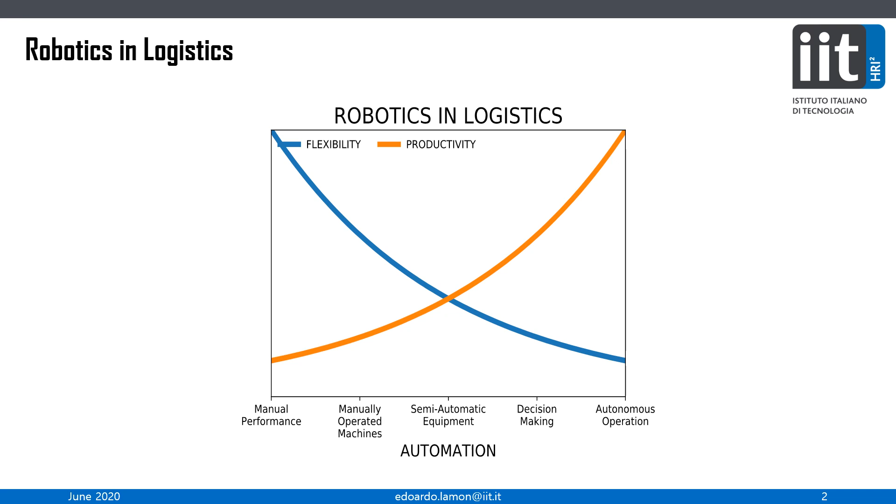Currently, logistics scenarios range from completely manual operations performed by human workers to more sophisticated fully automatized solutions. Robotic palletizing solutions have permitted to increase considerably the process's performance in terms of products per hour.

In food and beverage industry, for instance, heavy robotic arms that can lift up 1000 kilos are extensively used to palletize similar package types. On the other hand, not all environments can be populated by heavy manipulators for safety reasons. Besides, a wide variety of products in terms of size and weight demand for a certain level of manipulation flexibility.

For these reasons, it is clear that automation level involves a trade-off between productivity and flexibility. In an environment like warehouses, where not all the processes are automated and human presence is still a requirement, a safe and flexible solution for time-consuming and back-breaking tasks, for instance palletizing, is presented by collaborative robots.

Lightweight robotic arms can ensure human safety due to the ability to regulate interaction forces both with humans and with the environment, and can easily be taught with different learning techniques.

However, state-of-the-art solutions do not offer enough flexibility. The worker has still to adapt his performance to the robot. In this video, for instance, the worker has to place the pallet in a position reachable by the fixed base manipulator. Moreover, in such work cell, only human-object coexistence is achieved.

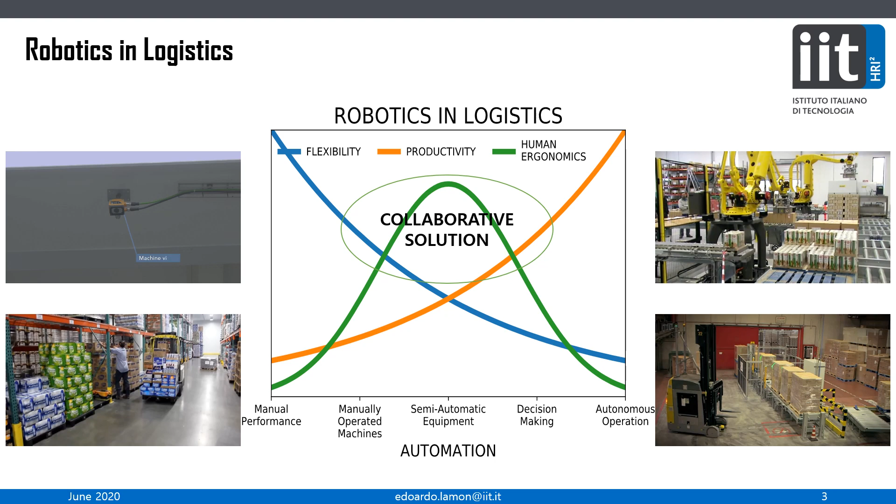A very promising solution is represented by the introduction of wheeled mobile robots. They can achieve repetitive and monotonous transportation of goods, while at the same time sharing the workspace with humans. Nonetheless, they lack manipulation capabilities to achieve human-robot collaboration.

To overcome these limitations, we propose to use wheeled mobile manipulators like our MOCA. Such platforms have the potential to navigate in flat indoor environments, avoid obstacles, pick goods from shelves, conveyors, and place them in pallets and pushcarts, autonomously or in collaboration with humans.

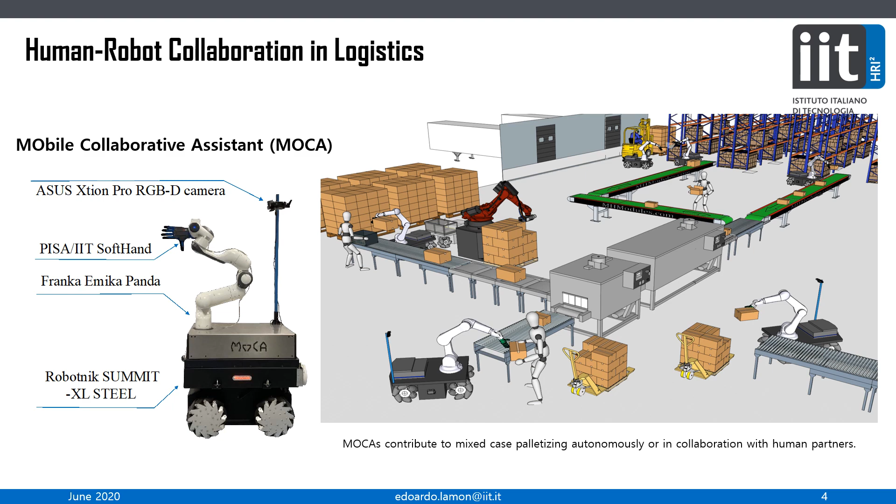In such scenario, the robot adapts its performance to the human, contributing to actively improve his or her ergonomics. The goal of this work is to evaluate the potential of MOCA in autonomous palletizing of mixed size and weight box containers. We propose a novel loco-manipulation framework for logistic applications.

The framework consists of three main modules. First, a task optimization algorithm maximizes the number of boxes that can be sorted on a pallet. Subsequently, an agent allocation algorithm is activated to designate the carrying and sorting actions to MOCA in an autonomous mode or in collaboration with a human partner.

Another module consists of the visual perception system that, using the RGBD data, estimates the poses of the boxes in the conveyor and the pallet location. Finally, the motion handler is in charge of generating feasible paths and setting spatial references for the controller.

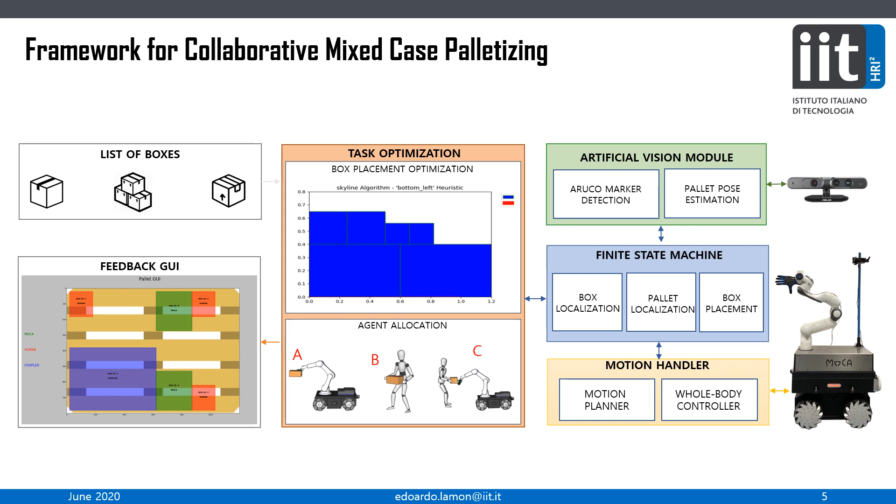MOCA controller is a weighted whole-body Cartesian impedance controller designed to regulate the behavior of the mobile platform with respect to the end effector task. The joint space weights of the controller are selected to obtain, alternately, higher flexibility of the arm in close proximity reaching sorting operations, and larger mobile-base mobility when navigating in free space.

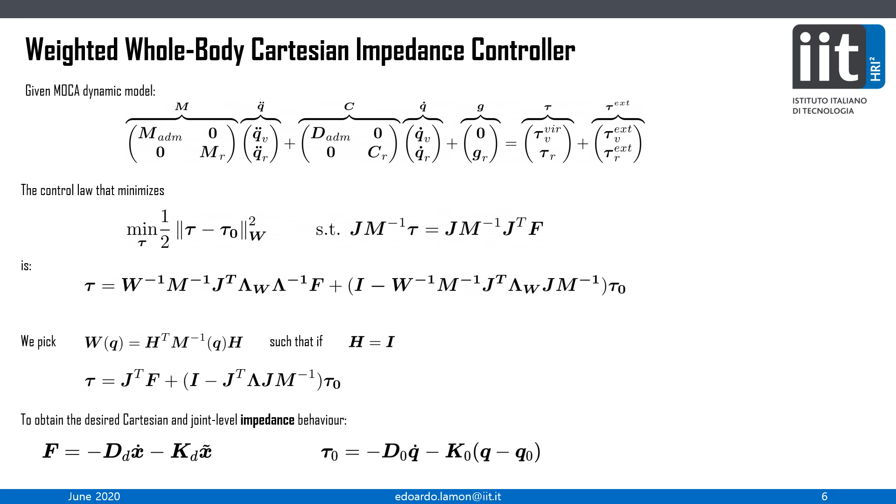In order to fully exploit the redundancy provided by MOCA, we designed our controller to have a priority by solving a weighted inverse dynamics problem. Then, the Cartesian trajectory tracking is achieved by modeling the interaction forces with the spring damper model.

I would like to clarify the effect of the weights on the controller. In these videos, the robot is scanning the boxes on the right side. Once the boxes are detected, it has to move toward the closest one. The reference Cartesian trajectory for the end effector is the same in both videos.

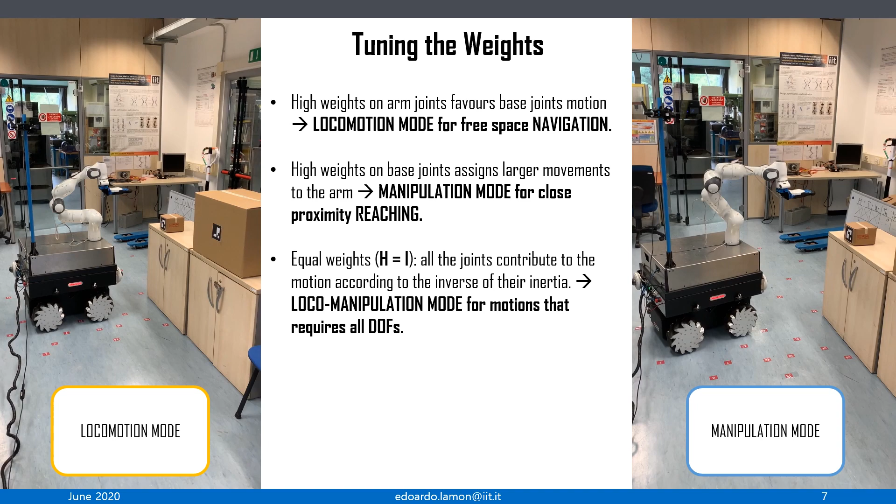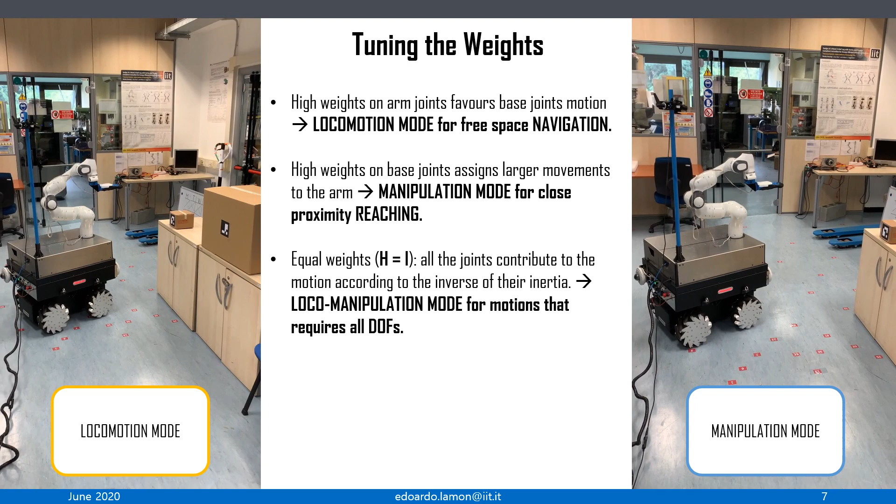On the left, we employ a strategy that always favors the mobile-base motion. As you can see, the arm moves slightly. On the right, after the scanning phase, we want to favor the arm motion to achieve the box reaching. The base still moves thanks to the whole body approach, but the arm motion prevails. This can be obtained just by tuning the weights on the H matrix.

The framework intends to improve the execution of mixed-case palletizing tasks in terms of time execution and density of packing, and to decrease heavy lifting requirements for human workers.

We would like to assign systematically a suitable agent to perform each box placement. The possible placement modes considered in this work are: Mode A, MOCA places the box in the pallet. Mode B, the human operator can place the box in the pallet, for lightweight boxes, for instance. Mode C, MOCA and the human operator place the box in the pallet, sharing collaboratively the load, for large boxes where dual arm manipulation is a requirement. This cannot be achieved by MOCA and might pose health risks to the human worker if handled individually.

The packing density problem is formulated as a bin packing problem. The goal is to orthogonally pack a set of rectangular-shaped items into the minimum number of identical containers, called bins. Different approaches differ mainly on the placement heuristics and on the left space splitting strategy. In the video, you can see how the skyline algorithm computes the optimal placement.

Random box position on conveyors and unprecise pallet location are problems that have to be considered in the framework. To increase robot state awareness and accuracy in the pick-and-place task, a vision system is designed to detect either boxes on the conveyor and the pallet.

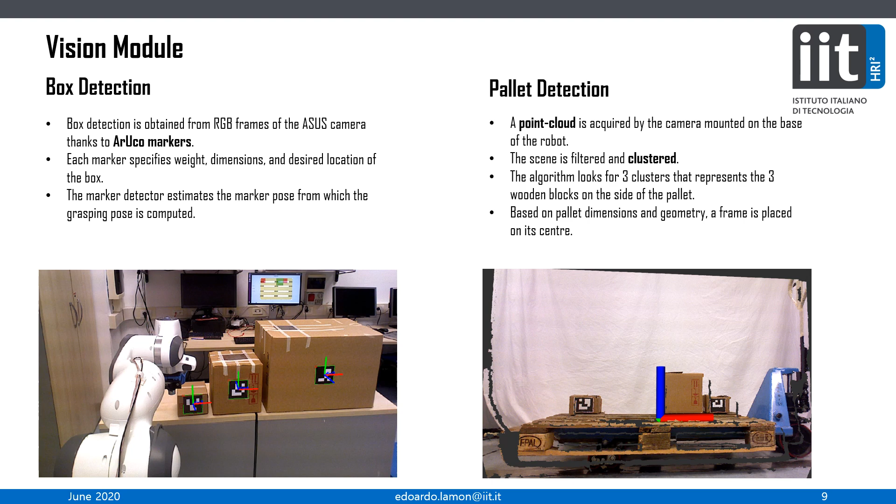We exploit the fact that in logistics scenarios, boxes are already equipped with markers or barcodes that specify product infos. We attach an Aruco marker to each box. The marker detector processes the RGB frames of the camera mounted on the pole and identifies the box ID and pose. The ID specifies the weight, dimensions, and optimized location of the box on the pallet. From the marker pose, the grasping pose is computed.

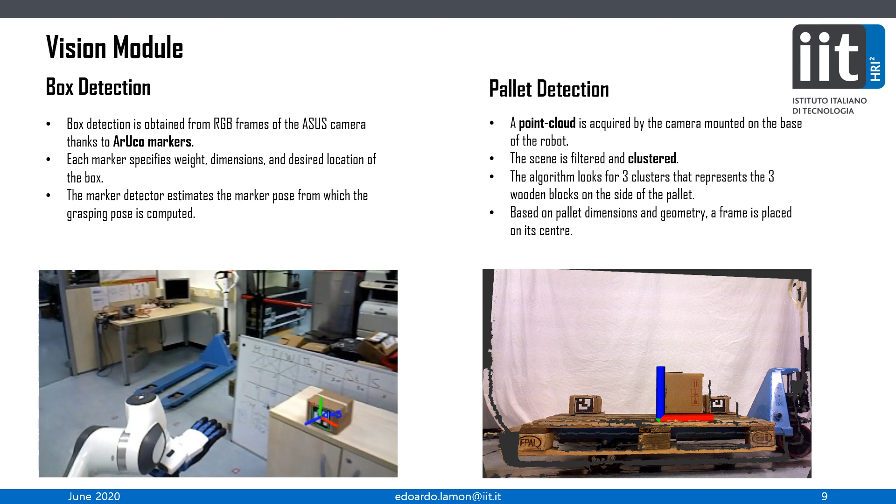The pallet is detected using the camera point clouds of the depth sensor mounted on the robot base. The scene is clusterized, and we look for the clusters that resemble the specific shape and geometry of the pallet.

The proposed framework was validated with 2 different experiments, executed by 6 different naive subjects not aware of the scope of the experiments. In the first experiment, we asked the subjects to place 11 numbered boxes of different size and weight on the surface of a pallet, in such a way that all the boxes could fit the lower layer of the pallet.

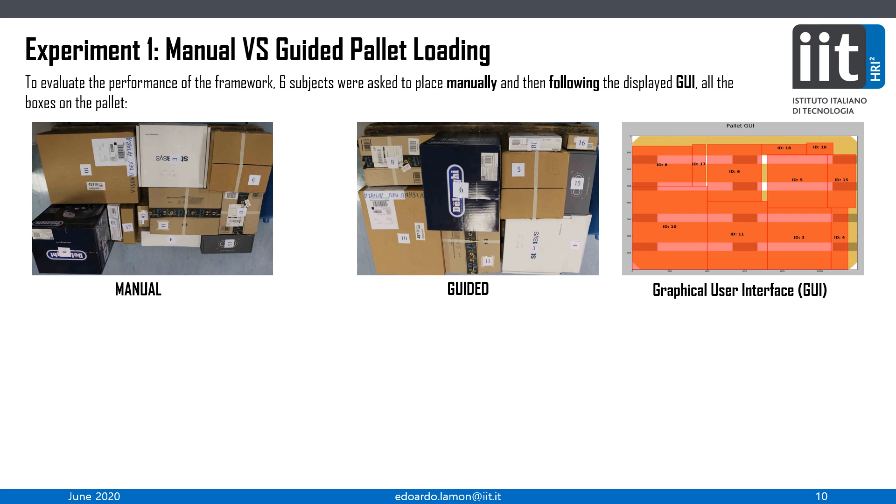Then, we computed the optimized box placement, and we asked the subjects to place them according to the algorithm results, displayed in the GUI. The performance comparison, in terms of time spent in completing the palletizing, reveals that the use of the GUI led to save up 20% of the execution time.

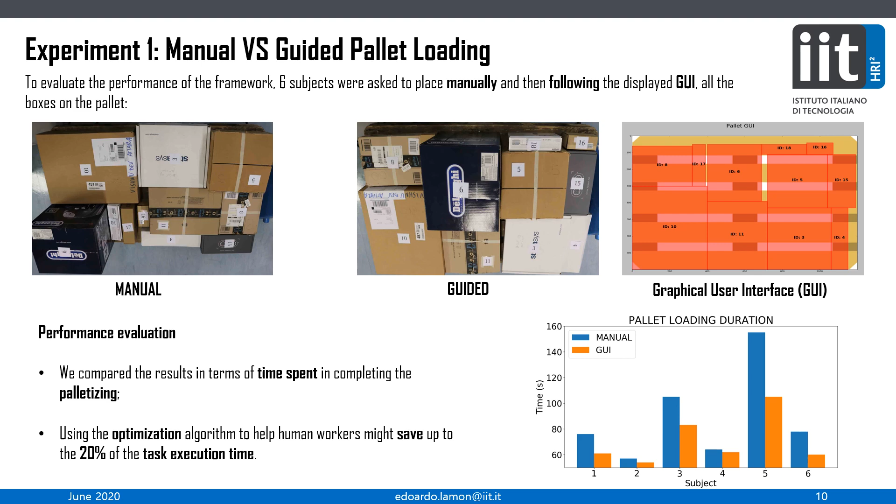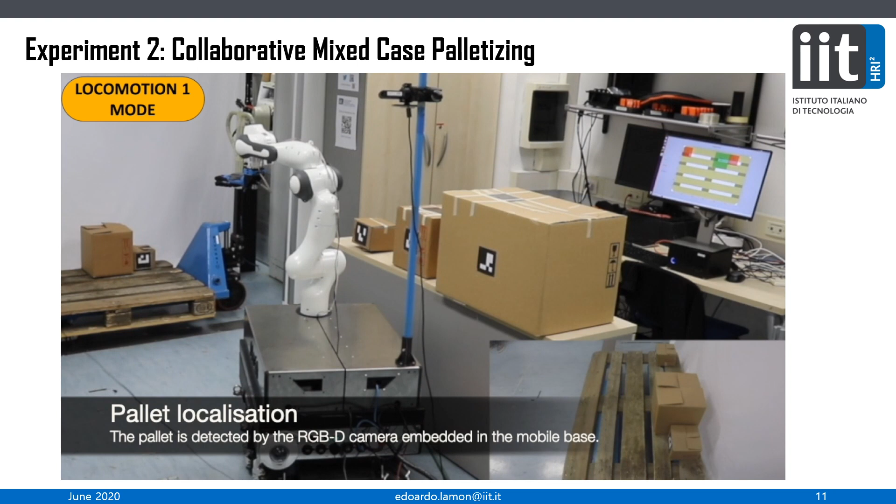The second experiment consists of a proof-of-concept collaborative mixed-case palletizing. 3 boxes were placed on top of a simulated conveyor. The pallet was placed close to the conveyor.

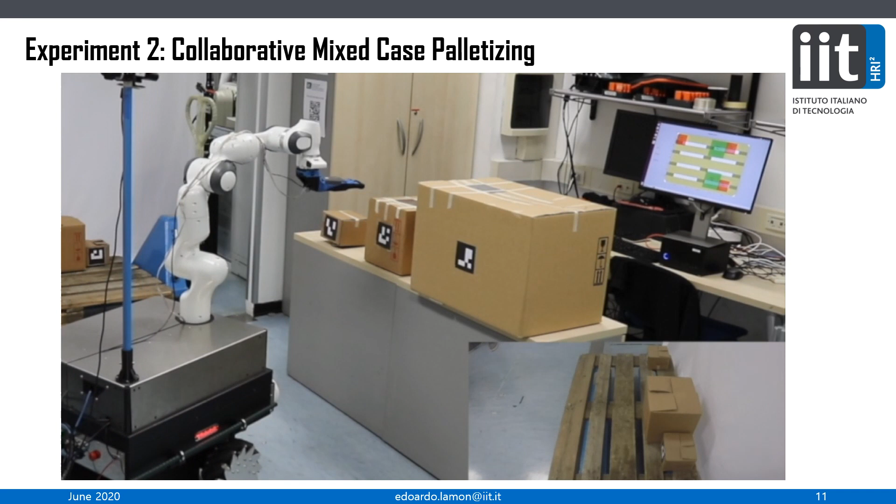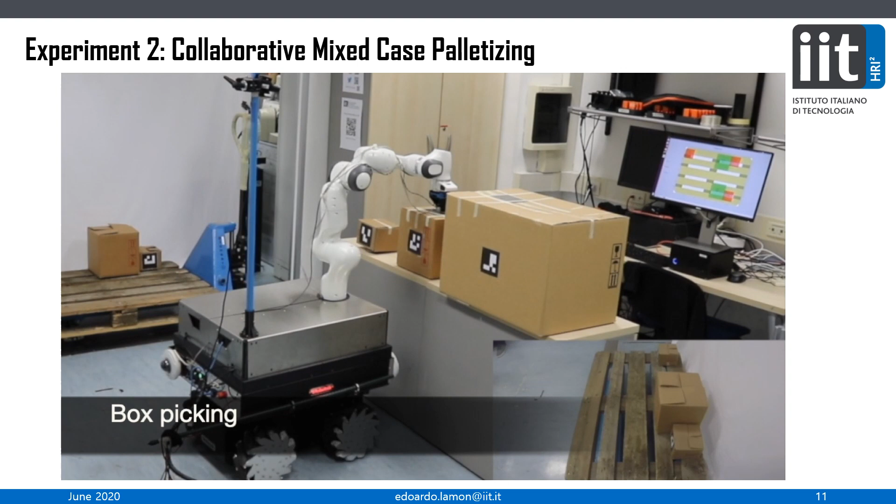The box placement is computed by the bin packing algorithm, using as input the total number of boxes that are supposed to be placed in that pallet. Moreover, the agent in charge of the placement is computed by the role-allocation algorithm, that will assign one of 3 modes, A, B, C. The robot has just a rough idea of the pallet and conveyor location.

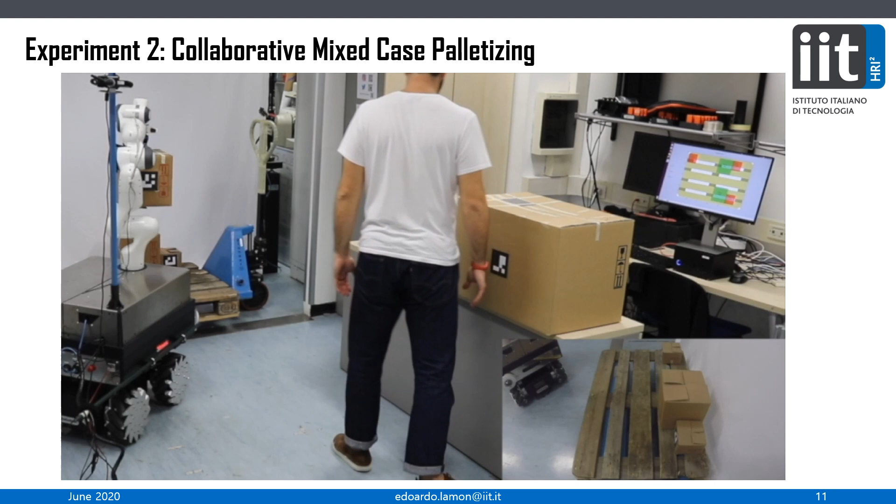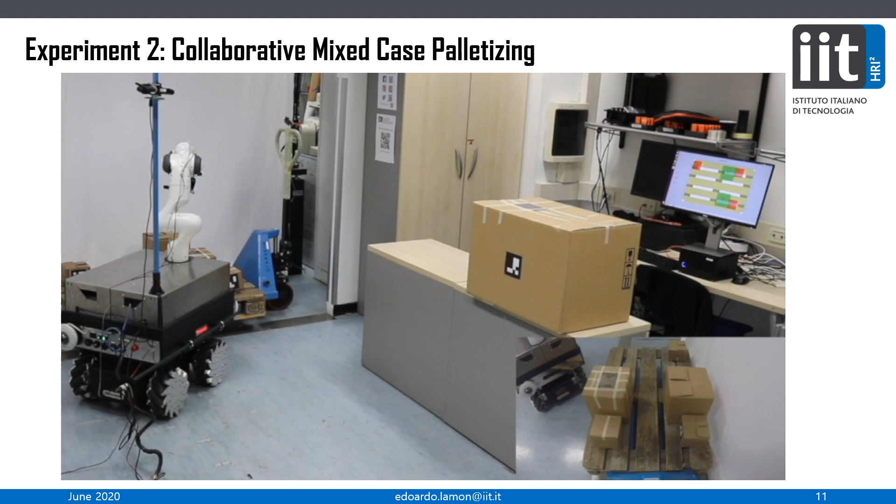The boxes have to be detected every new placement, since, in general, the number of boxes in the conveyor might change, due to newly delivered boxes, and also because of considerable errors in the robot odometry. Just the detected boxes will appear in the GUI, with a different color depending on the mode: red for mode A, green for mode B, and blue for mode C.

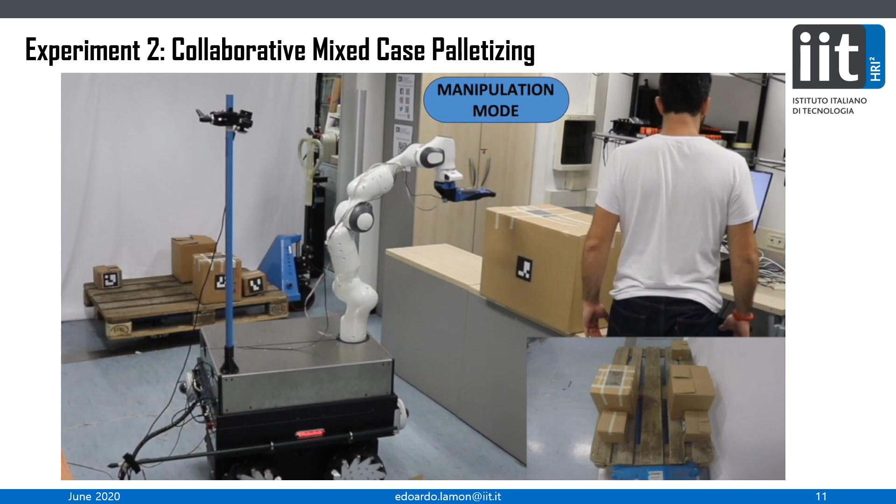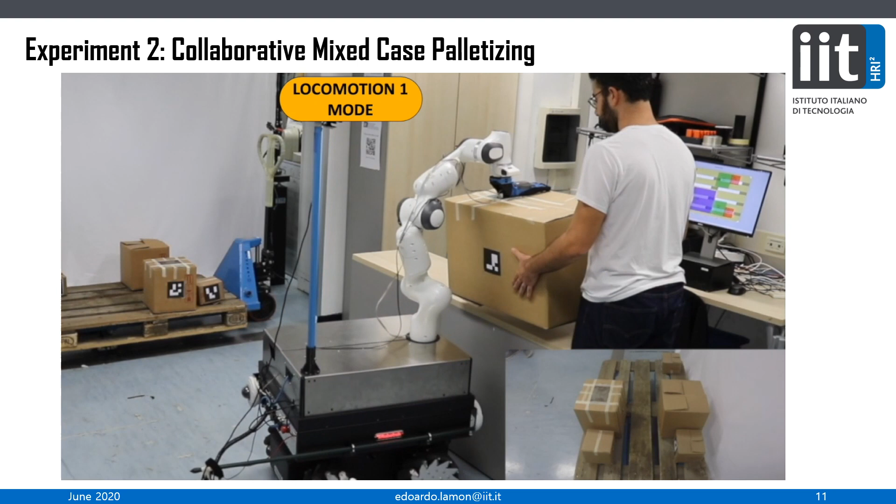First, MOCA places the green box. At the same time, the human worker, who is periodically monitoring the GUI, recognizes that there is a red box that he could place, and he places it in the desired location on the pallet. Finally, a collaborative placement is obtained, where MOCA and the human carry together the box and place it on the pallet.

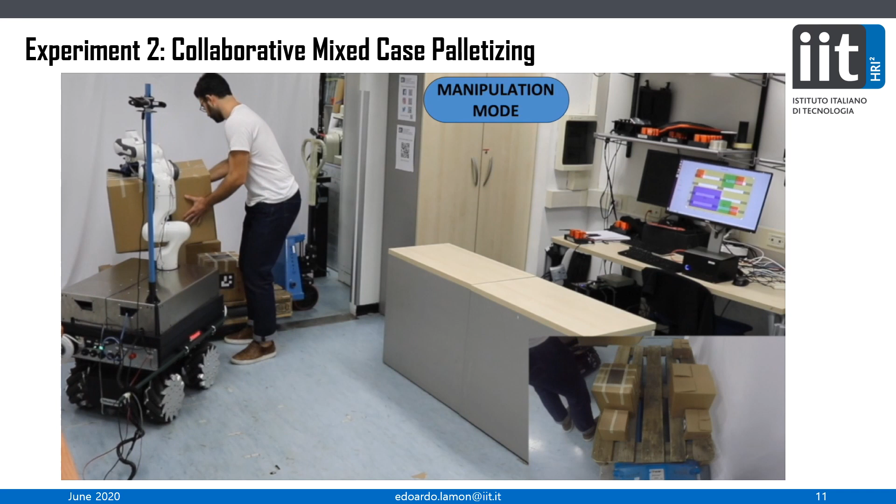To have a subjective evaluation of the experiments, we asked the subjects to compile a Likert scale-based questionnaire. The participants stated that the manual performance requires greater physical and psychological effort, with high cognitive load, with respect to the smart collaborative approach. On the other hand, the proposed framework presents promising results in terms of performance and work quality.

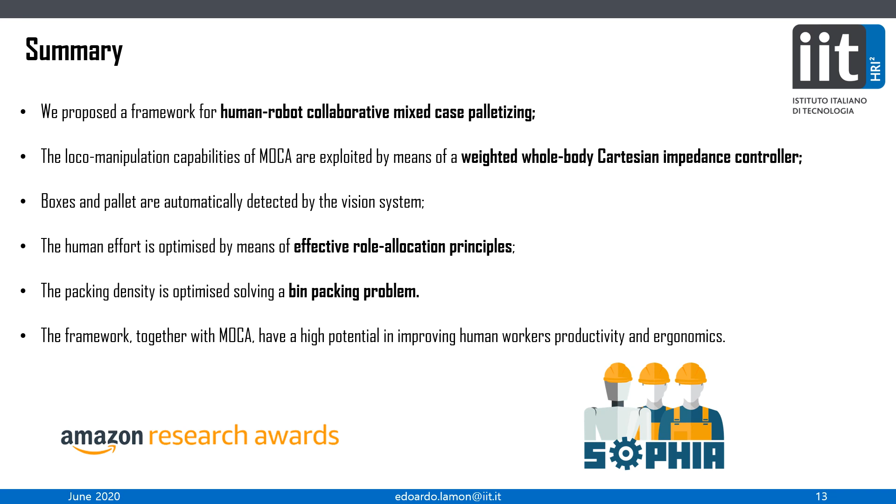To summarize, in this work, we presented a novel human-robot collaborative approach for mixed-case palletizing. Several problems were addressed, like robot control, perception, and task planning. The results demonstrated that such framework, together with MOCA, have high potential in improving human worker productivity and ergonomics, and they represent a promising first step toward an intelligent collaborative robotic system for mixed-case palletizing.